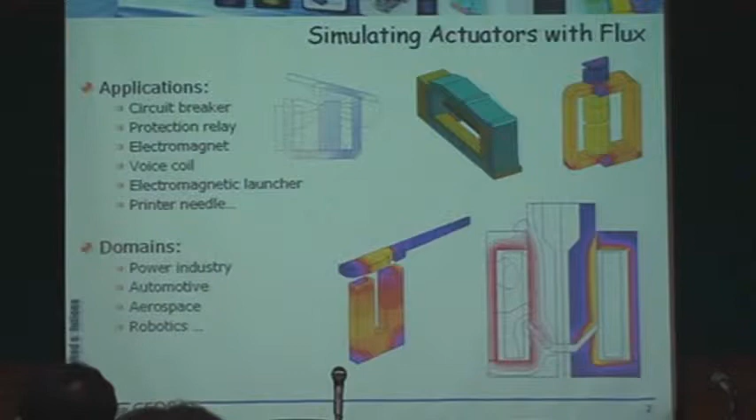Today we will look at a specific application with a solenoid.

When you design an actuator, what you can get with Flux is quantities like induction or magnetic force. These are magnetic quantities, but because we have electric circuit coupling, we can also access electrical quantities like the voltage, the current, or the inductance of the coil. So here we get the typical curve of the current in a coil when you close the air gap of a solenoid.

We also have coupling with the mechanical equation, considering the movement of the mobile part, giving us access to position versus time. So we see the actuator moving from the open to the closed position, with all kinematic values like acceleration and speed, getting the full dynamic behavior of the actuator over time.

To broaden the view of the tools we have for designing such an actuator, we have not only Flux but also Portunus and GOT-It. In Flux we focus on magnetic analysis, available for 2D and 3D in exactly the same environment. We can perform magnetostatic analysis, transient magnetics, and for contactor applications that work in AC, we can also consider steady-state AC computations.

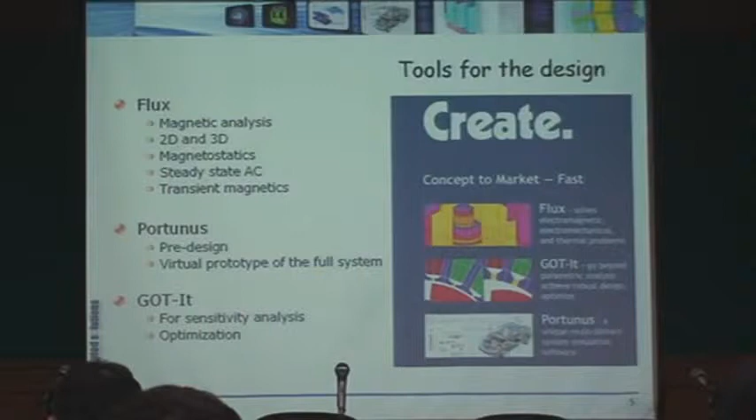And GOT-It - we had this presentation from Philippe. At each step of the design, it helps to do sensitivity analysis, optimization, to get the values of the design parameters from the requirements of the system.

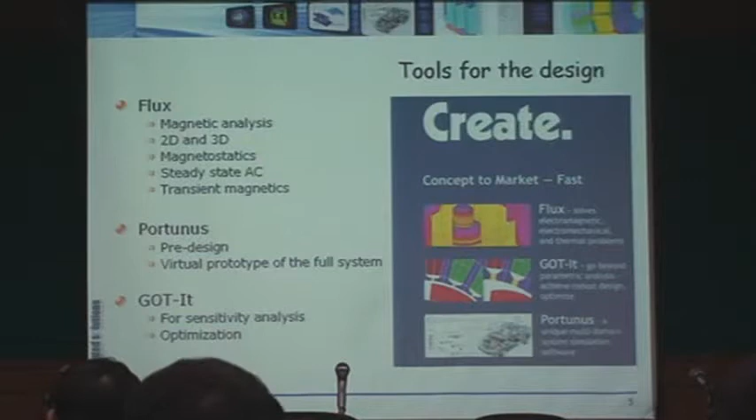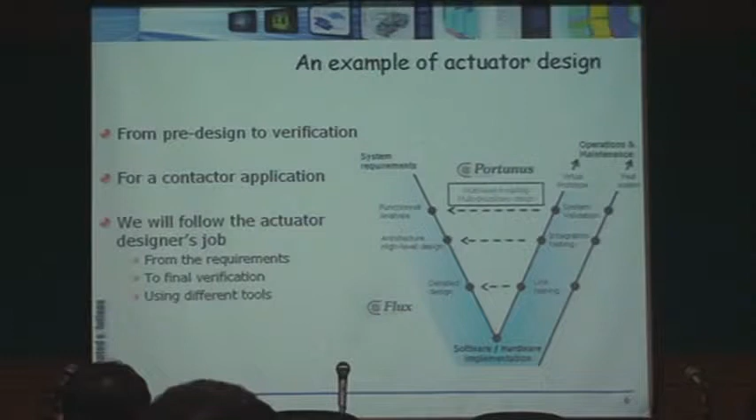The idea here is to take an example and go through it from the pre-design phase to the verification phase. Let's imagine we are a solenoid designer, part of a team designing a system in which there is this actuator. We will go from the requirements that come from the system to the final verification.

We'll start with simple modeling in 2D magnetostatics and go up to 3D calculations, using different tools: Portunus, Flux, and GOT-It. We won't do a full demo of GOT-It, but we'll see some Portunus and Flux simulations.

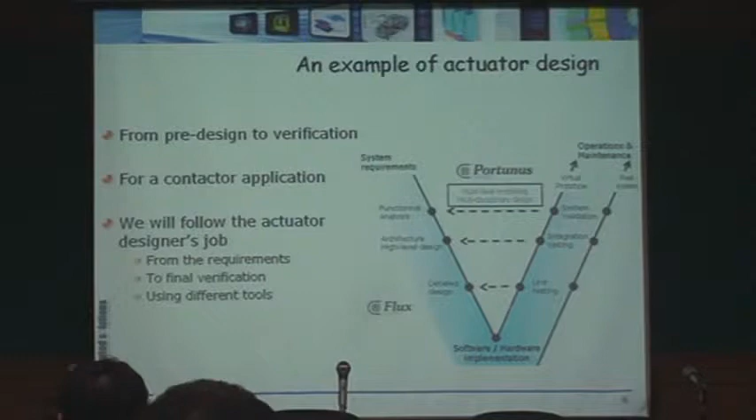Let's begin with the system. What is the system we intend to design, and what is the role of the actuator in this system? The actuator we try to design together is this actuator.

This is the full system, and here you have the actuator. Here you have a power circuit, and the role of this actuator is: if I command it and put it in the on position, it will close the contact and feed the power system. I can turn it on or turn it off.

I have another role for this actuator: if there is an overload detected by this sensor, information is treated, and we ask the actuator to trip and open the contact. So if there's an overload on the line, we open the contact - that's the actuator's role in the system.

So what I propose now is to look at this system modeled in Portunus.

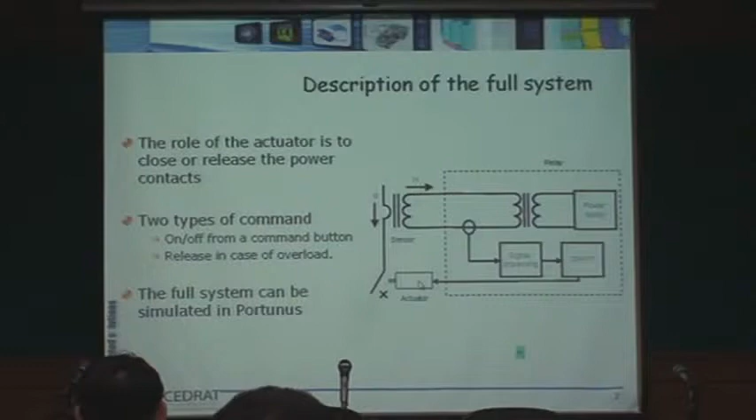So we have the full system here. We have the power line with the switch commanded by the actuator, and the load of our circuit is very simple - just a lamp. We also have a very small resistance to simulate some kind of short circuit on the power circuit.

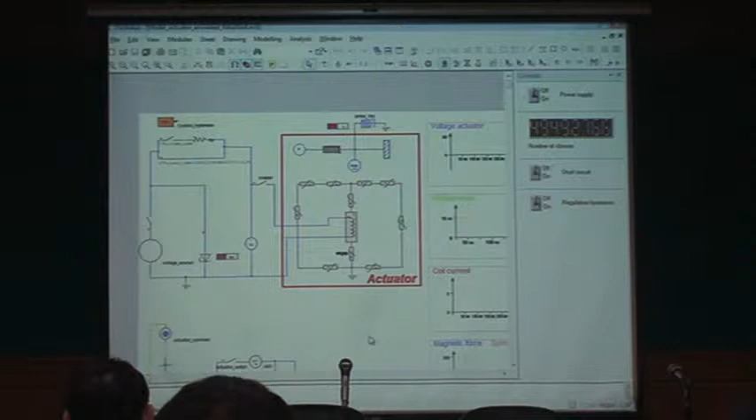On top of my model, I have the electronic circuit that feeds my actuator, with all the control - here I have advanced control, hysteresis control of the actuator. Then I have a first model of the actuator, and at this point I just have the main principle, not the geometry. I just know it will be a simple actuator with a coil, with an air gap that will be closing, and some magnetic circuit.

With this first model, I'm able to simulate the behavior of the actuator. I will run this model, and here I can control the power supply - you see it's on, and then the actuator is closed, and my lamp here is lit now.

I can regulate the current that feeds my actuator, so I can turn it on or off. If a short circuit appears, the actuator will trip the switch and open. Look at this - now whatever happens, if I try to open or close my contacts, it does nothing because a short circuit has been detected. Now if I reset it, it comes back again.

Okay, so now I have my full system, and I know what my actuator should do, and also I have all the requirements for my actuator, because I know now it should close in so much time, open in so much time, and so on.

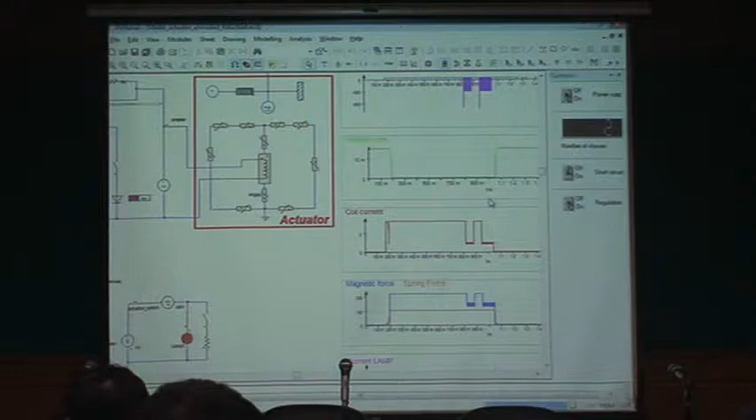So we have the pre-designed phase here of this actuator directly in Portunus. Because we have this reluctance network model, we'll be able to play with this model and determine first dimensions and also some analytical calculations for the coil characteristics, for example. Coil characteristics is not something that you have in Flux. This is something you have to calculate in an analytical way, and then Portunus is able to help you in this situation.

So the actuator will have to close or open in so much time, so in less than 30 milliseconds for the closure time, for example. And we'll have also to ensure some contact pressure when the power contacts are closed. The force on the power contact should be sufficient. So this is the kind of things we have as an entry point to the design.

Then we will enter really the design phase, and we will do this job with Flux. First we'll do some 2D axisymmetrical formulation and from a 2D sketching. So now we have decided a shape of the solenoid, a very classical, very simple shape for this example.

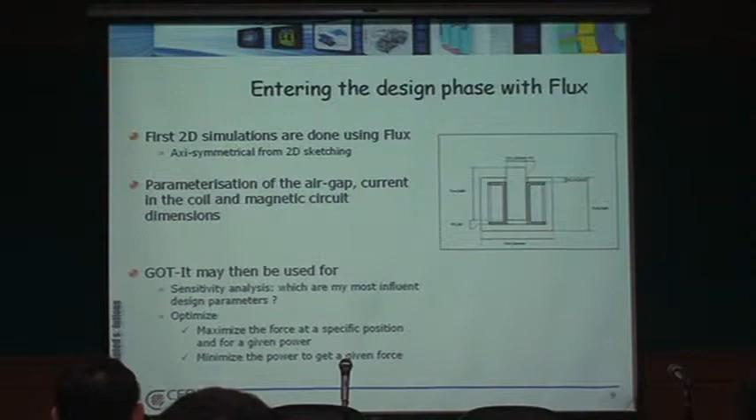So we won't do the optimization, we will just start with the 2D model, and the idea here is that I do a demo directly in Flux and see how fast we are able to get a first 2D model running.

So my supervisor is open here, and then I will enter directly into the sketcher. And if I remember well, I will sketch my actuator here. So I know globally the dimensions.

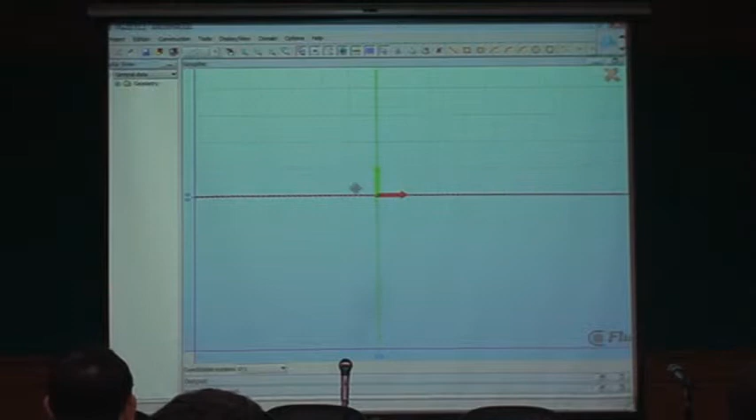Okay, so just zoom at the good scale. Okay, so I need a 15 millimeter air gap.

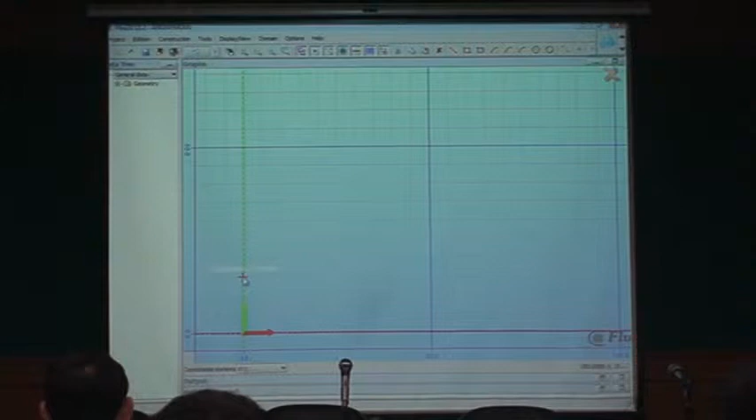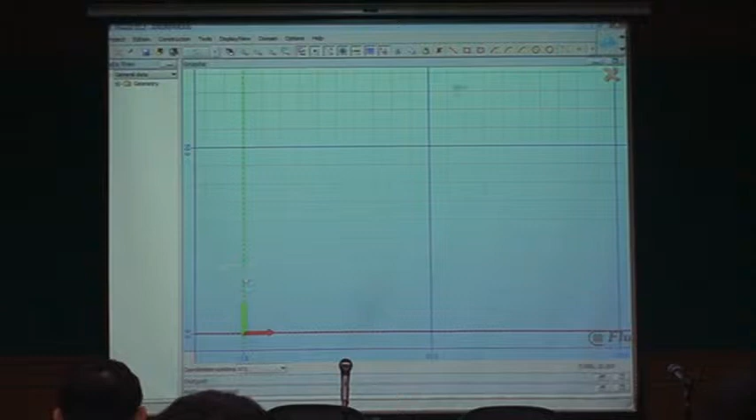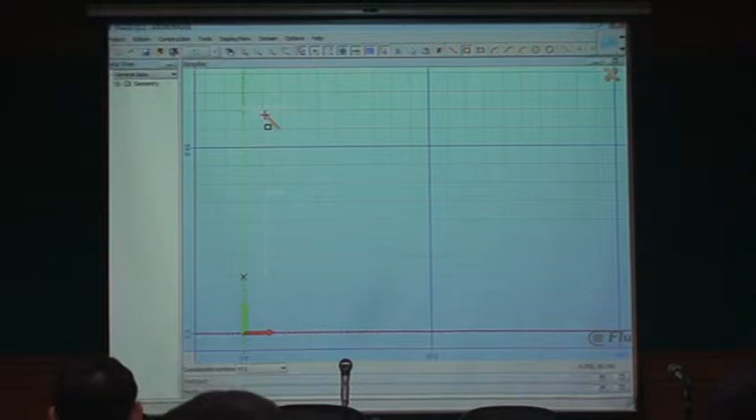So I will start here at this point. Okay, and then I forgot to click somewhere. Okay, so let's put here a 50, let's choose a 50 here, and something close to 7 for... okay, so I'm quite good here. No, this is 35, so let's do it a little bigger. Okay, like this, okay, I'm happy with this one.

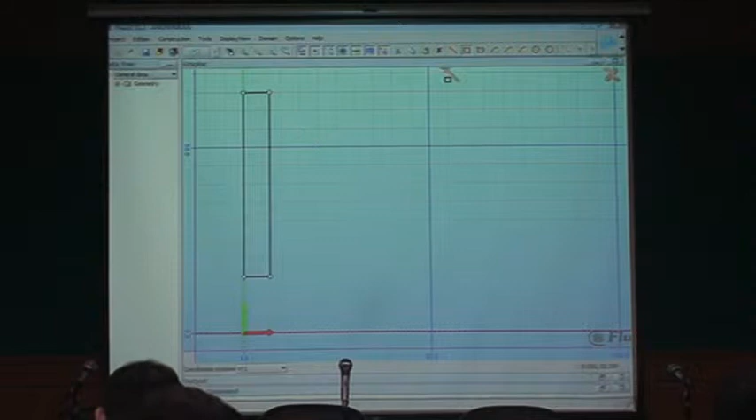Then now I will draw the core. So the core is just starting here at 0, 0. And then I will choose a 5 millimeter here, no, more 30 here. Voilà.

It's 45. Okay, let's do it fast here. So you can see I'm guided throughout the process here. And okay, so I have my core.

So maybe something I want to do is to get closer here, so just move this a little bit, because I think the air gap is too big here. So we'll refine a little bit and put only 1 millimeter between the two.

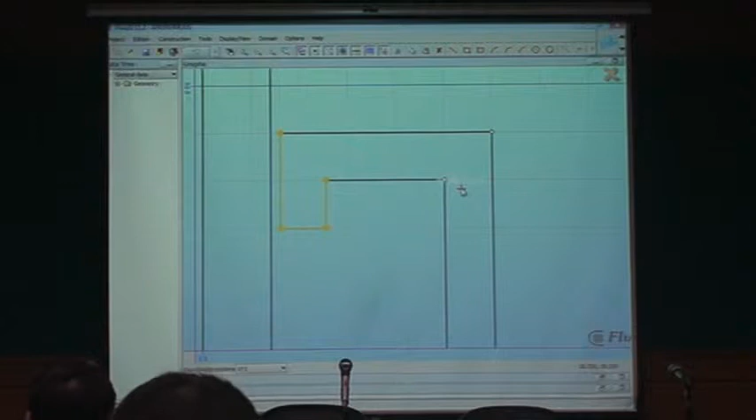And then what I need more now is the coil. So I put the coil in the middle here, somewhere here. Okay, let's draw it. Okay, so looks good. Okay, so I have my actuator here.

So it will be simulated in an axisymmetrical model. So I'm finished here, but the only thing I want to do now is to parameterize the position of my mobile part here.

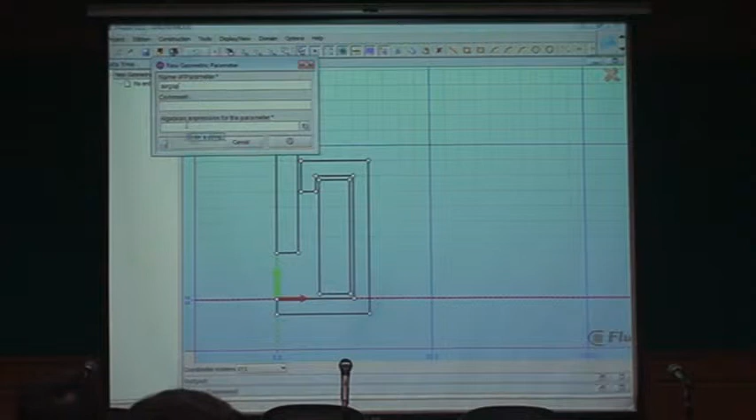So what I will use now is I will create a geometric parameter. I will call it air gap. So it's 15 millimeters, okay.

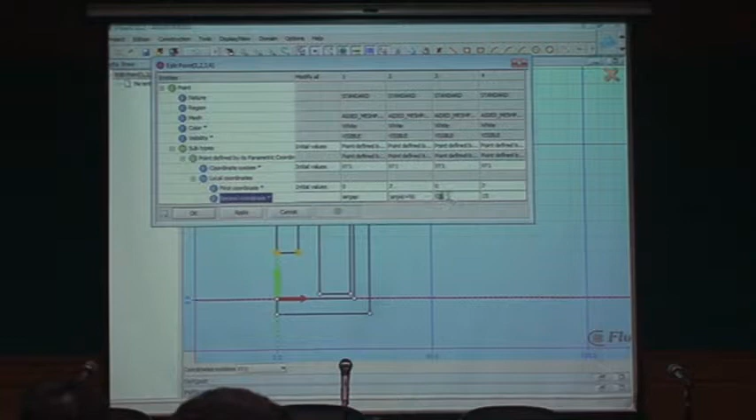And then I will edit all my points here, and I'll be able to parameterize all these 4 points this way. So this is really the value of air gap, and this is air gap plus the size of the mobile. Okay, same here. And then I have air gap here. Okay, should be happy with this.

Okay, so let's check if this is working well. Just edit this parametric jump, this parameter. Let's put 1 here and see how it goes. Okay, I'm quite happy, so it moves as I want it to.

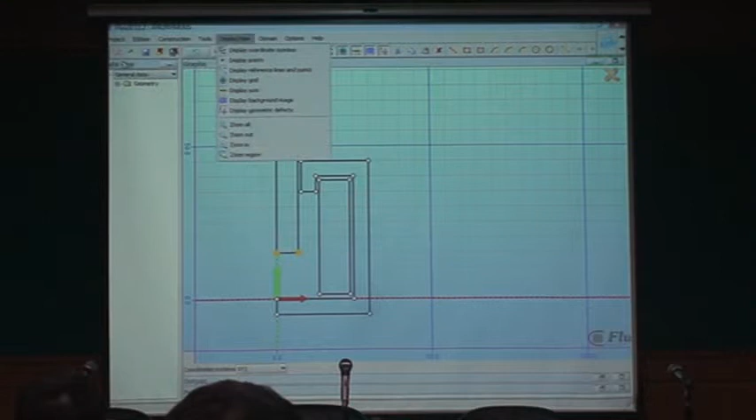Okay, so I'm already finished for this one, but what I need now is to create an infinite box, so just go out of the sketcher. I will define directly my application just right now. It's axisymmetrical, and then I need to create this infinite box here to get the magnetic field correctly in the air.

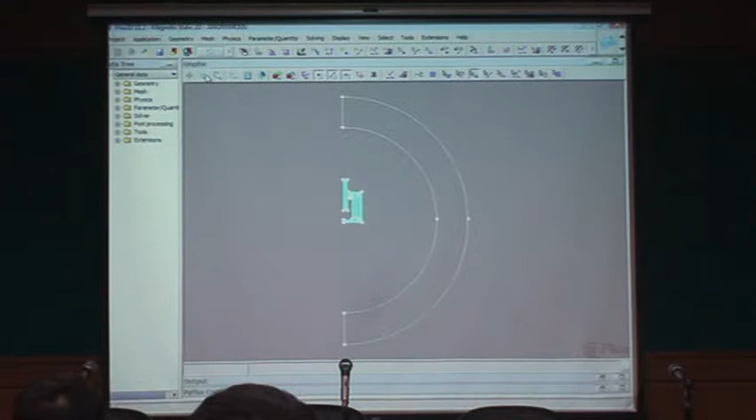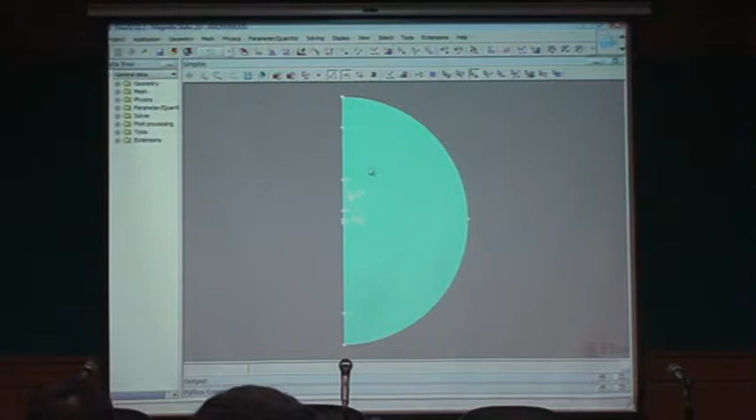Okay, so here it is, and now it will be completed automatically. So now I have all what I need from the geometric point of view. Let's try then to go to the mesh, and let's try the one-click mesh, as I call it.

Okay, this is it. Well, not too bad, but I'm not that happy with what happened here, because I know the air gap will close, and because it will close, then I have to refine the mesh in this area, and also maybe it's good if I refine here.

My choice here is to refine. Maybe I can change just a little bit also the relaxation factor here, and I will just change the mesh on this point, this point, this point, this point, and this point, and I will put a small size.

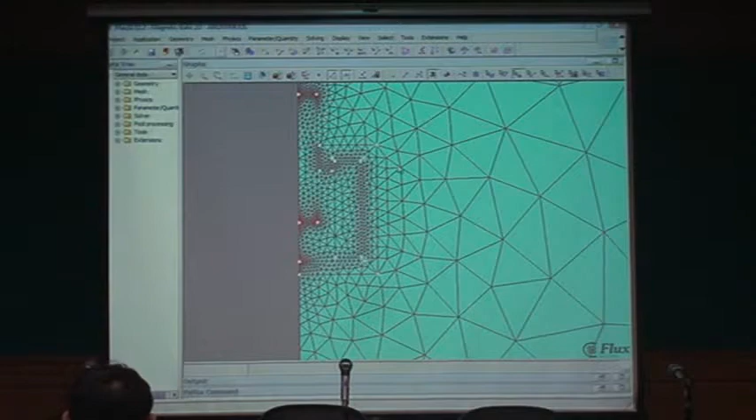And what is small size? Just have a look at it. The small value is, I will put something like 0.25. That will be the value I will use for the air gap when it is closed. So I apply here and mesh again. Okay, so looks quite good for me.

I'm quite happy with this mesh. So maybe the good thing at this point is to save. Let's save it.

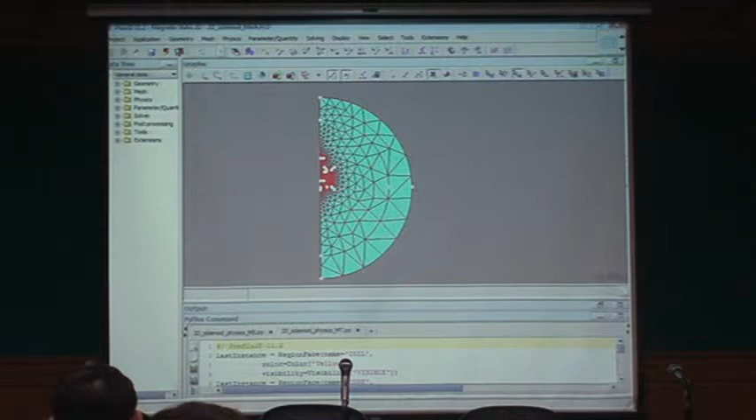Okay, and to get quicker to the results, I have prepared a Python file. And this Python file just defines the geometry, so the different regions. It will characterize, so you have the material also here that is used. It will define the characteristics of all the regions automatically. So I don't want to do that just in front of you.

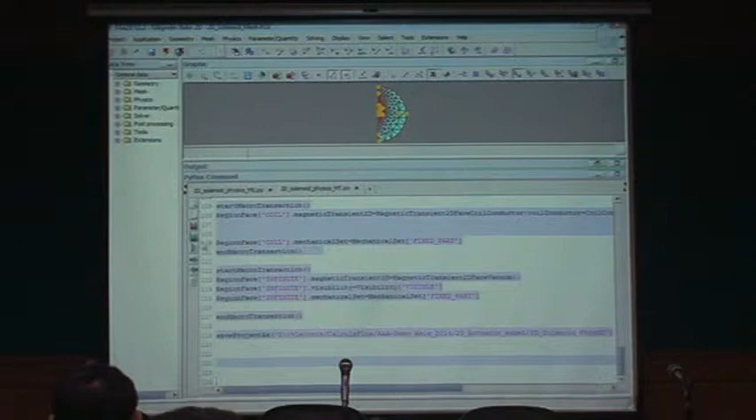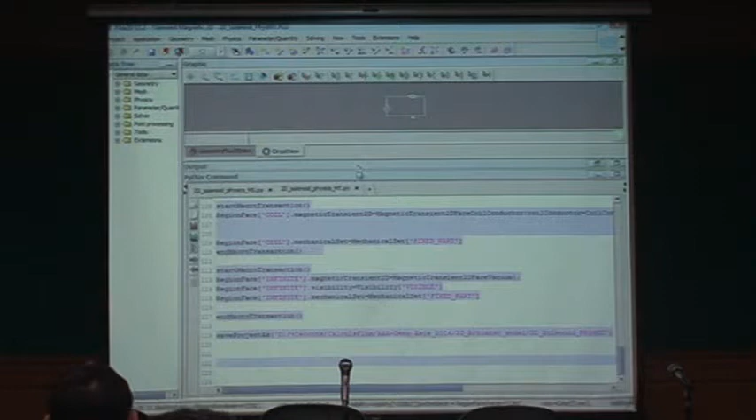So what I do is I just select all my file here, and I will just run it. So here, when I click here, it runs all what I selected in the Python file. So just now close this window. So I see now I have a circuit. This is not what I wanted to do, so I'm stuck here.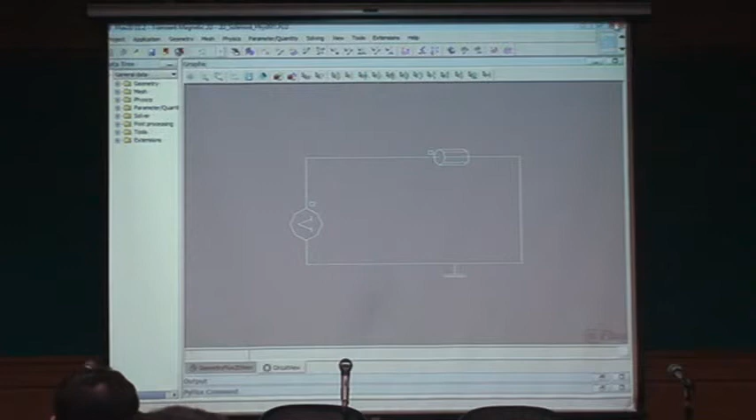Okay, I defined a magneto transient. I wanted to define magnetostatic physics, so I will close this one and reopen another one, which is magnetostatics.

So my aim, in fact, now is to calculate some surface response. My model is almost ready to solve now, and what I want to get is the flux in the coil and the force on the mobile part versus position and current, so position of the mobile part and current in the coil. And these tables, I will be able to use them in Portunus to represent the behavior of my device.

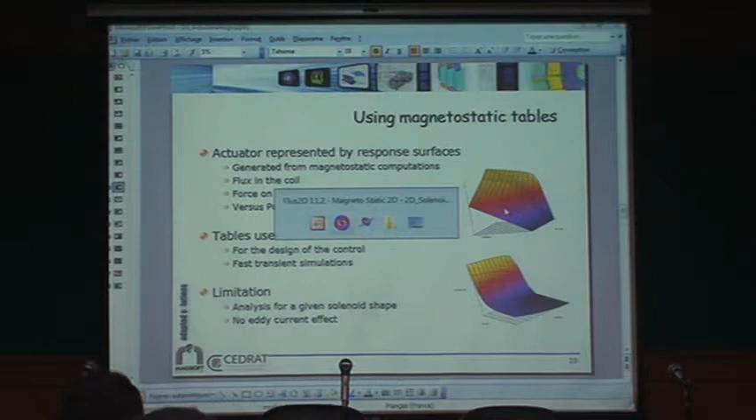So let's go and do it in the software. So I have my magnetostatic model.

I also have some parameters like the force, the current. I have some sensors ready. So this is the flux and the force on the plunger. And then now I have just to solve,

creating a new scenario. And because everything is parametric here, I will be able to select the air gap. So I will start with 0.25 with a higher limit of 15. And I don't want to do too many steps, so I will add a few steps only.

3, and then I refine at the beginning, and then let's put an 8 here, and then 10, 12, and 15. Okay. So I will have 10 computations for the air gap, and so I have to use the current.

So the current is really controlling the current in the coil. And for the current, it goes from 1 ampere to 4 ampere, and let's put 4 steps. So 4 steps times 10 is 40 computation. Just apply it and just solve now.

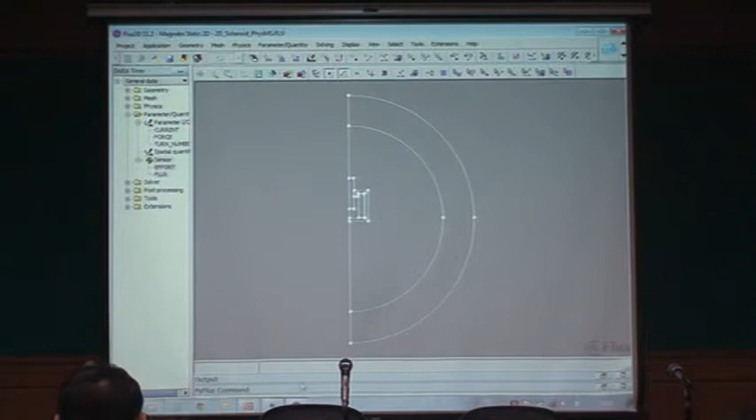Of course. What I didn't do is that I had to first assign the regions, because I have defined all the regions, but I didn't tell what region was, what face was affected to a region. So this is air.

This is my plunger. This is my coil. And this is the core.

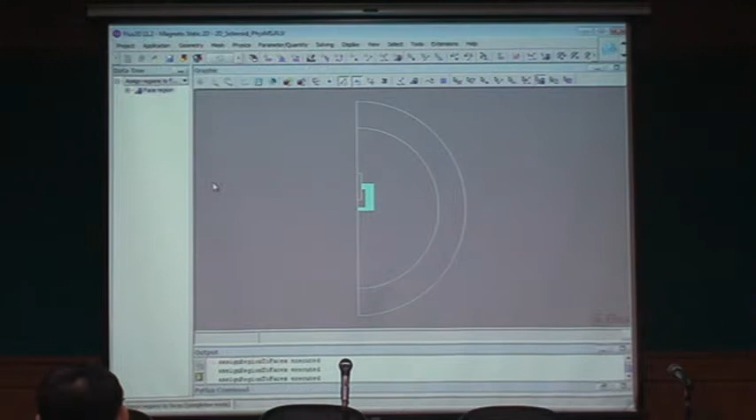Okay, so this time should be ready to solve also. Okay, so it will solve for the 40 steps. So it goes quite fast.

After 4 steps, it takes a little bit more time, because then it remeshes, it changes the position. First, it changes the current, so it changes very fast. And then it changes the position, and at this point it has to remesh automatically all the geometry.

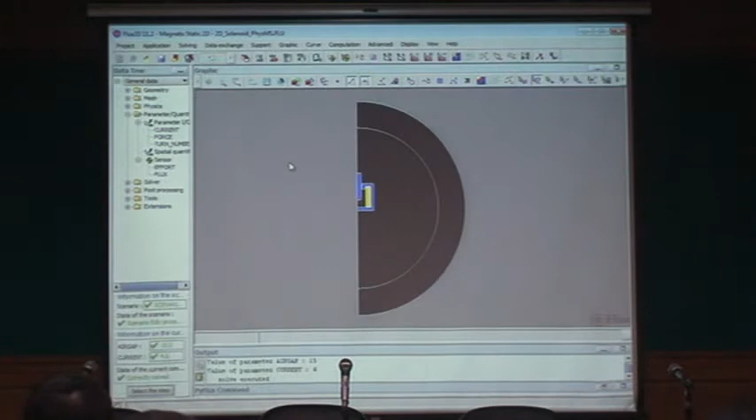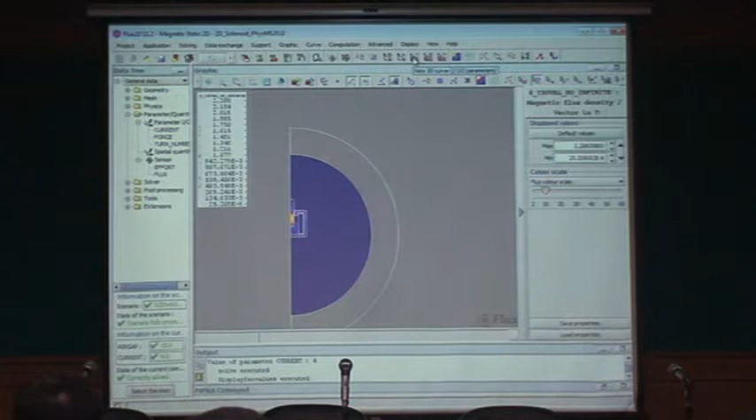Okay, so we are close to the end here of the calculation. And then we will have a look at, maybe just here to check. Okay, looks quite good. And now what I want to have is the curve, so the different curve versus air gap and current.

So what I want is, I think is force. Or EFFORT, okay. That is one, and then the flux. I just type it like this one. Okay. No, not on the same one.

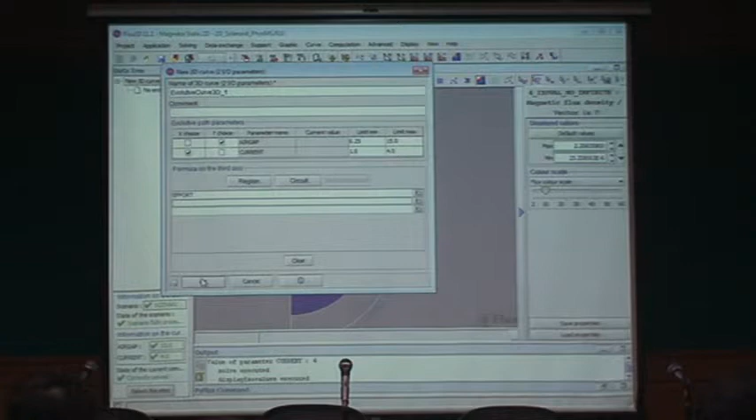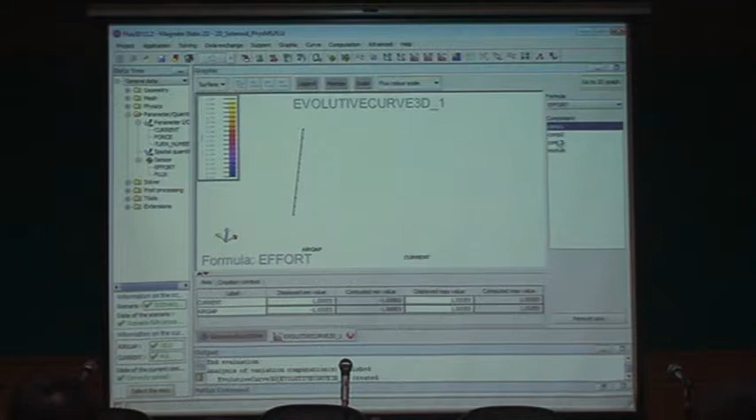Just the force. So the force, yes. That was EFFORT. I don't know why. Okay. We have to move it here. So we have our curve here, and we can get exactly the same for the flux.

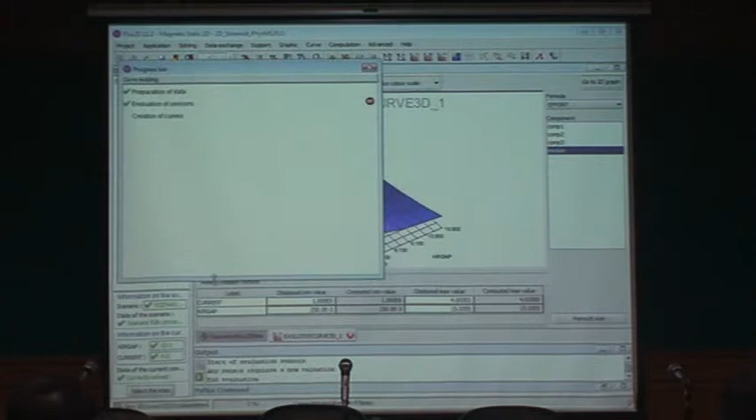Okay, so I have my curve here, and we can see also the effect of saturation with the current, and we have the effect of the air gap.

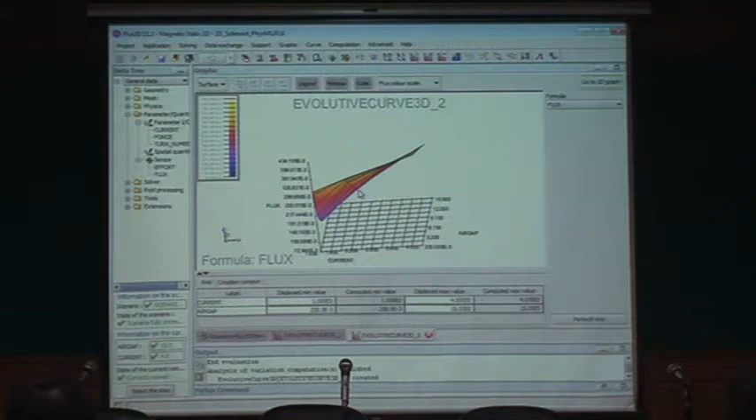Okay, so now I have my tables, and this table, what I will use them for is to verify that this design, if I put this design into the system, does it work as it was intended to work? And because it's in Portunus, then it's fast. So let's try this.

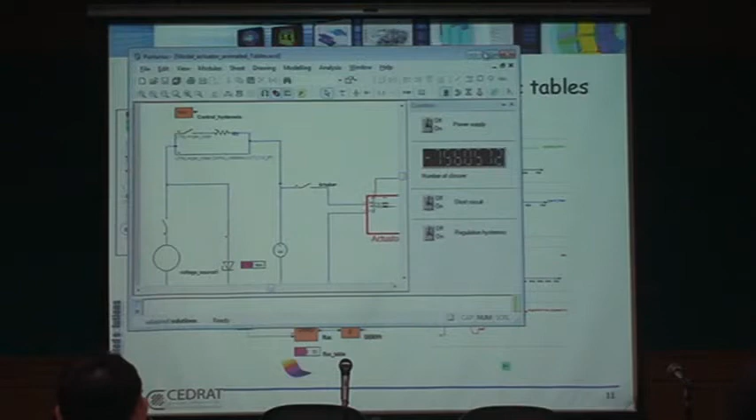So we have this model. We go back to Portunus. And when we compare this model to the model we had at the beginning, now the actuator is no more represented by a reluctance model, but we have a full model with the tables.

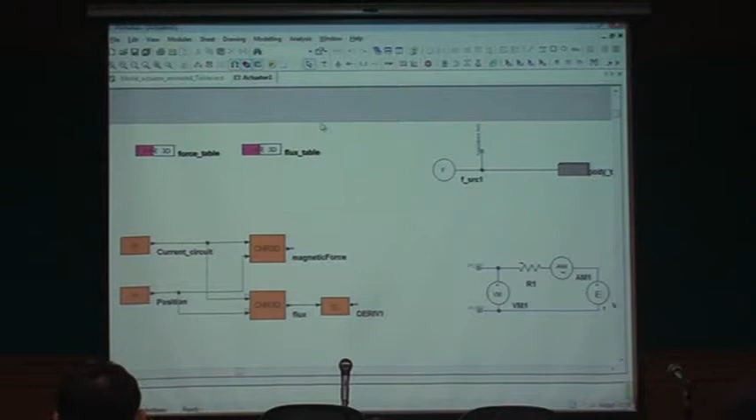So I have a subsheet here with the force table and the flux tables, the one that I just created, and it's now ready to run, and I can check if all of this runs correctly.

So the lamp is hidden here, so just turn it on. It takes a little bit more time to compute. The tables is something simple, but not as fast as a reluctance model. So we can check once again that if I short circuit, you see, when I click on short circuit, then the green will just disappear, and just a little after the red on the lamp also will disappear. So hop, hop.

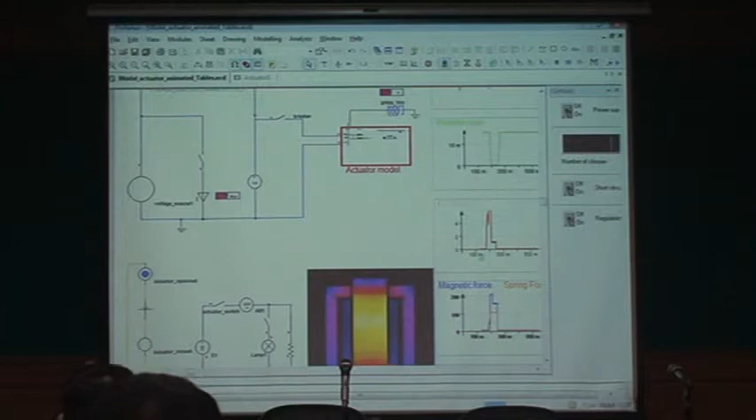You see, so the actuator really did its job, and we have all the curves here. We can check on the coil current, we can check the core position and the magnetic force, the spring force, and all this stuff.

Okay. Then let's close this model.

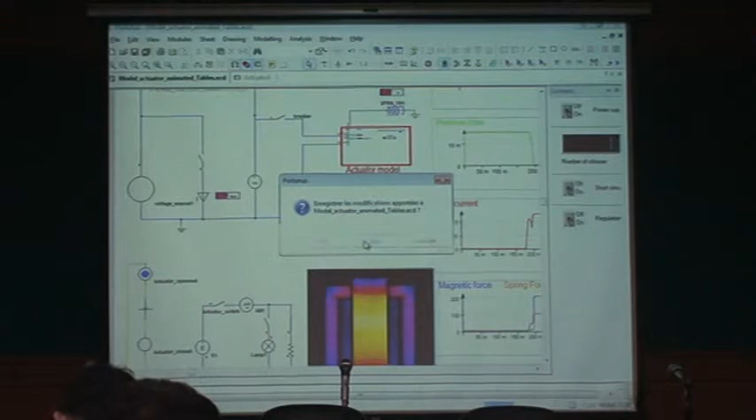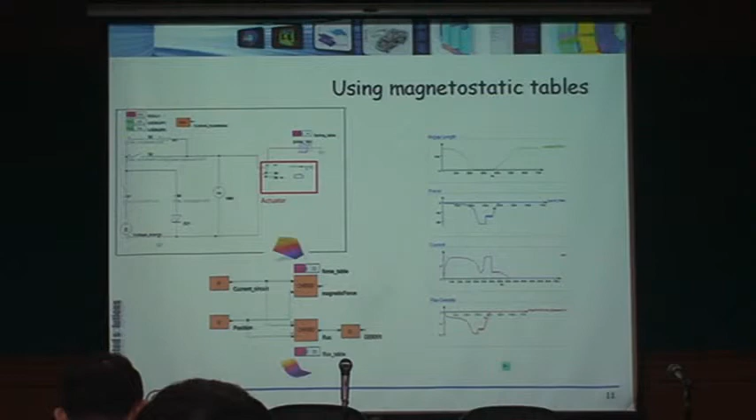The limitation of this kind of calculation is that we don't consider eddy currents in the actuator. And it may happen in some cases, if you have a high-speed actuator, that you have eddy currents, and this is something we would like to check.

And to do so, we have to go to magnetotransient analysis. Magnetotransient analysis will have the current variation directly in the coil with flux. We'll have the movement, and we'll be able to measure the effect of eddy currents.

For example, here we have the curve of current. Here it is characteristic from the moment at which the actuator is closing. You see that it is closing a little bit later, and also if you look at the integral here, you can see that more energy is necessary to move the plunger.

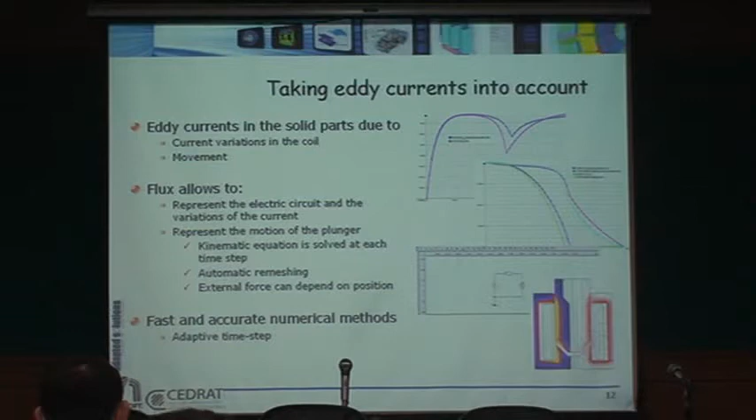So the eddy currents we will take into account are really the eddy currents due to the current variations and to the movement, both. And everything will be calculated automatically.

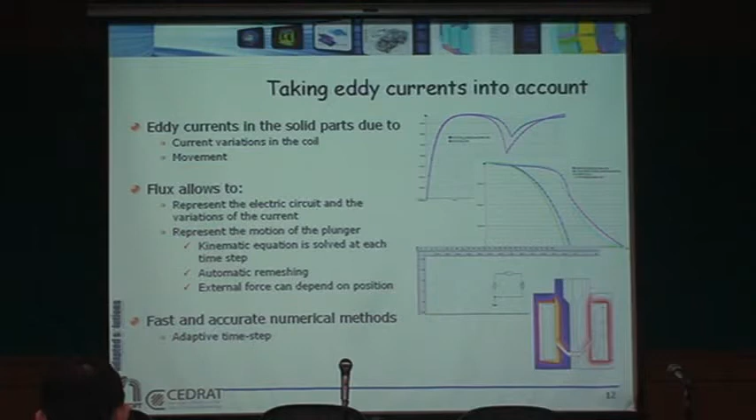And what we have, and which can be interesting, is the adaptive time step, that we choose the time step in the software just to make the necessary calculation during the time.

At this point, we also can use GOT-IT, and it can be used with a transient model. And at this point, then, we would minimize the response time of the actuator for a given power. So we have an example here where we have 15% of gain between the initial device and the optimized device for the response.

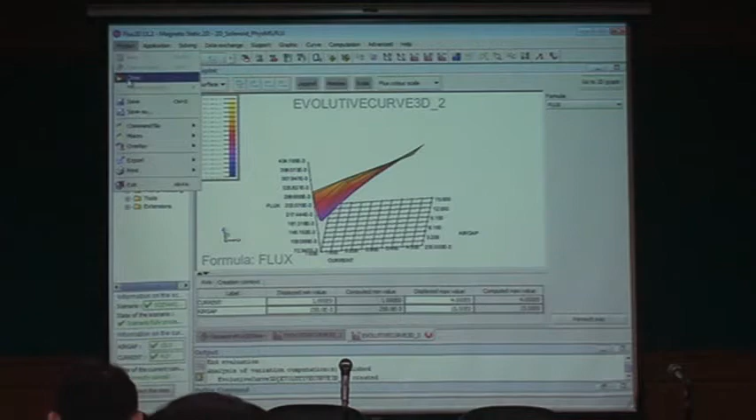But let's go back to Flux, and we won't solve the transient model. I have solved it. I have prepared a model already with everything solved, and then we'll be able to look at this model and see what we have.

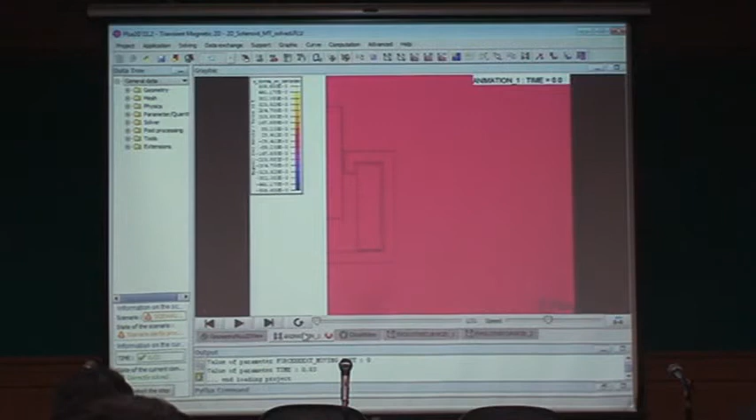And maybe the first thing we can look at is a movie. The movie is interesting because we clearly see the effect of eddy currents here.

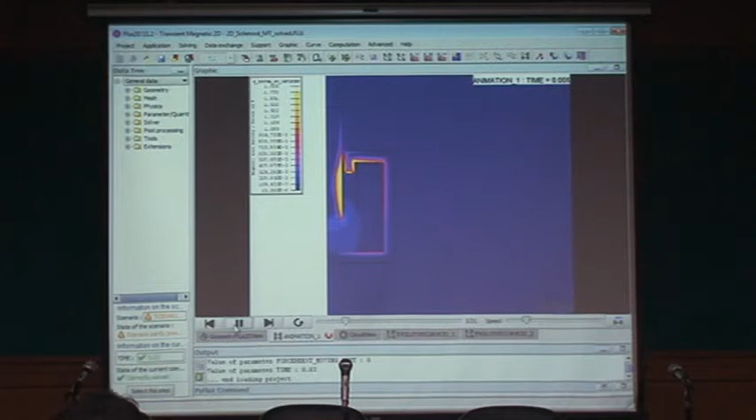So what you see here, if I go back to the first images, you see the flux here has not really penetrated in the bulk of the core or the plunger. So this is really due to the eddy currents that prevent the flux from going deep at first in the matter. So when time goes by, then you see the flux that is going inside really the plunger, and also we have the movement and everything.

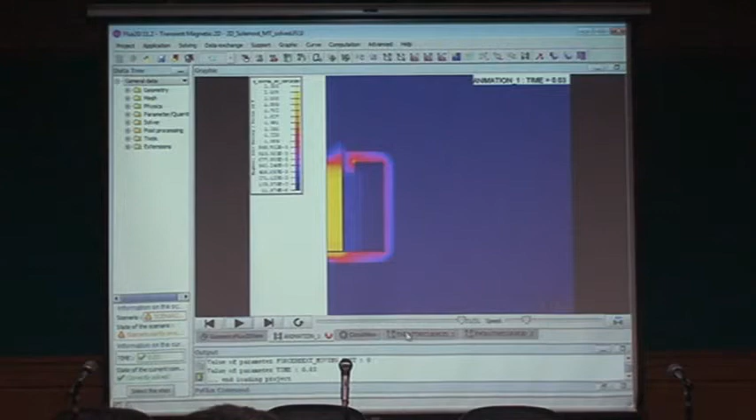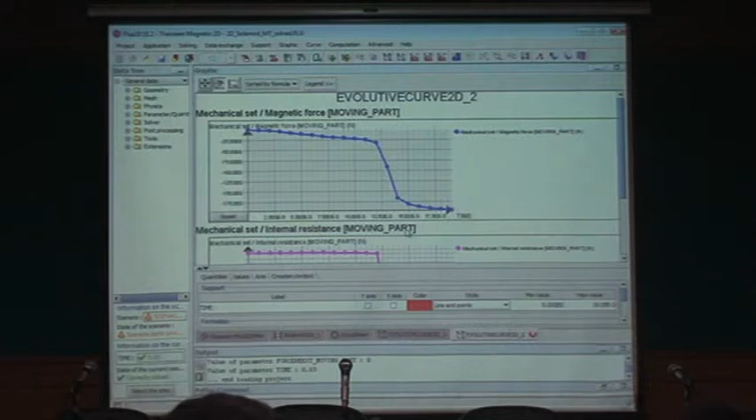This is an interesting curve in which we compare the resistive force. The resistive force is a spring. What we can see here is that the spring force is changing with the position.

So this is something that was entered and that was defined thanks to a tabulated parameter. And this is usually the case for an actuator. It has to face some force that really depends on the position.

And we see here the electromagnetic force. And in fact, the movement will begin just at this point. And because there is some inertia here, we see it goes, the force is stronger than the spring force, and can overcome easily the spring force here, getting up to 175, even close to 200 newtons. Okay?

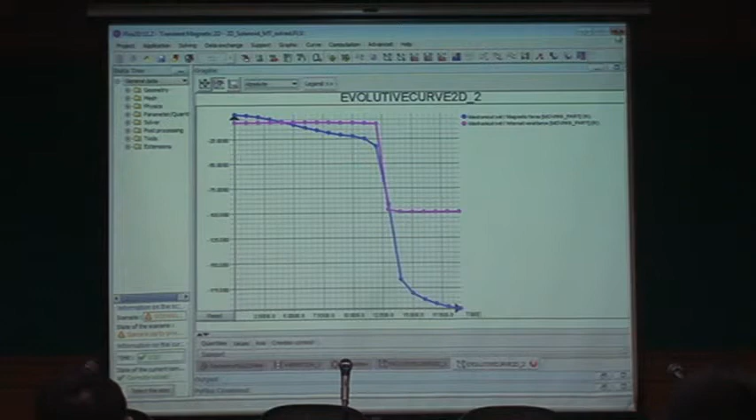Going back to my presentation, up to now we had just the Portunus with reluctance model, with the tables.

We could see in Flux that eddy currents can have an effect on the behavior of our plunger, of our solenoid. So now if I want to consider the full system with the eddy currents, I have to go into Portunus, and it is possible to do co-simulation. We replaced the table by a Flux component into the system model.

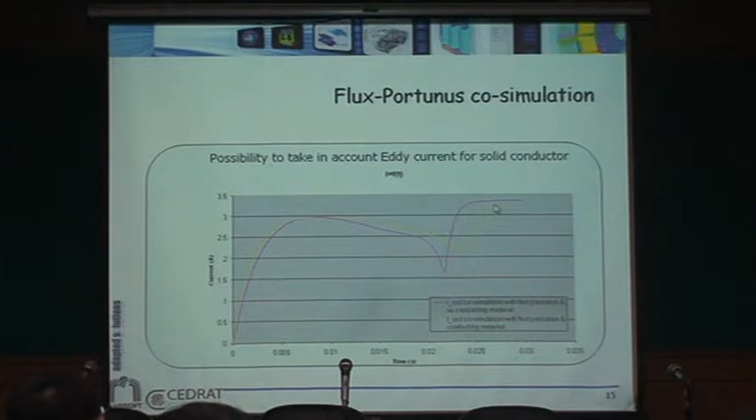The kind of results we can have: in yellow, we have the curve we obtain in Portunus with eddy currents, and the curve we get in Portunus without eddy currents. So we clearly see here the effect, even at the system level, of the eddy currents.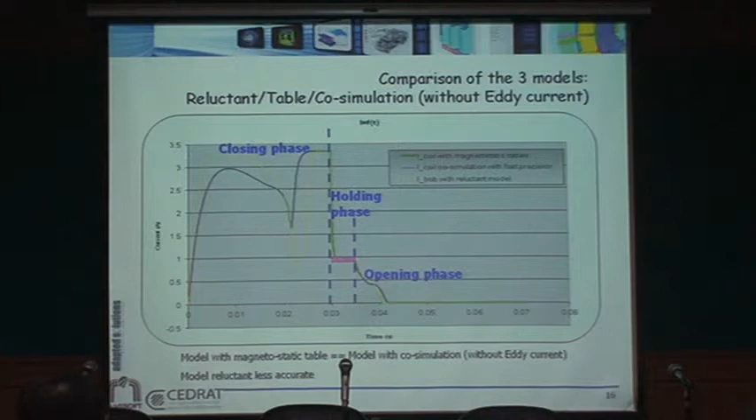So it's only for pre-design, right? But when you go from reluctant to co-simulation, then you need more time to solve.

Now we are at the last step of the design, we go to the mechanical design. Because I'm just the electromagnetic designer, I won't take care that much about mechanical things, but when I go to see the CAD people, maybe this is what they will draw on their computer with Creo or with Inventor or some other CAD editor.

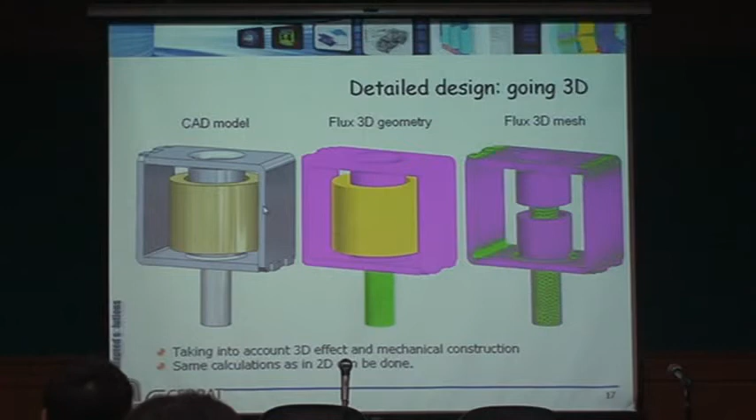And then I have to check in Flux 3D that this design really corresponds to the requirements. So what I propose here is to do the job and just import the CAD model and bring the mesh to this model. So I'm now in 3D.

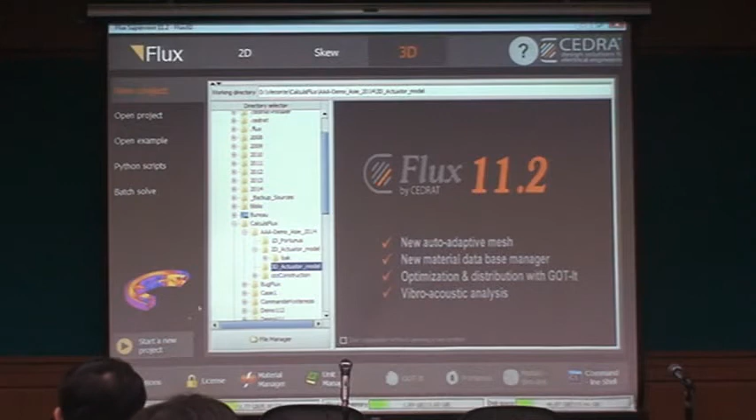I will start a new project in which I will import the CAD model the mechanical guy just gave me, and mesh it automatically.

Just wait for Flux 3D to start. So I think now I'm ready, and I will import. I have several formats of import, but what I have here is a step file.

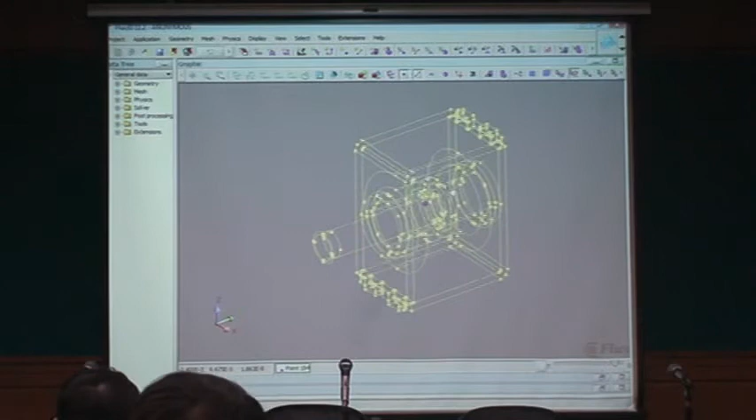I will select my step file. It is ready here. Click on OK, and then the software will import and do some healing operations automatically, some assembly operations automatically. And here I have the faces, I have some volumes available.

And what I need before we go further is to define the air all around my geometry. So I propose to put the same size as for the 2D.

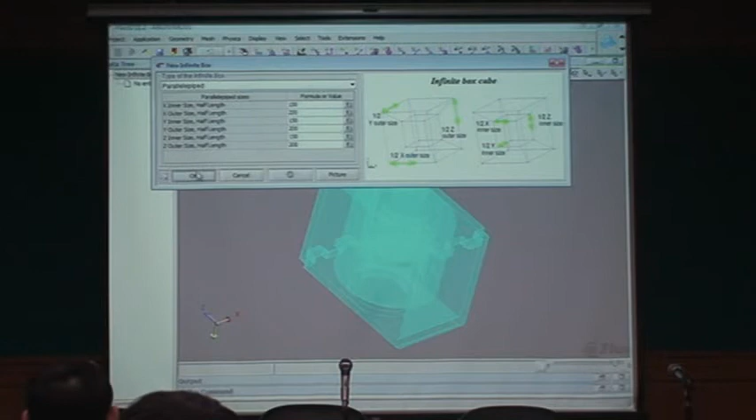It's there, and making sure I have everything I need, I've completed it automatically. That will build all the face volumes just all around my geometry.

Now just go to the mesh, and I will just mesh the faces. So it may take some time, and why it takes some time is we will see it when we go deeper into the model. There were very, very small air gaps.

Very small air gaps in the shape of the core. At this point, the software is trying to refine the mesh just in these little air gaps, and we'll see it does a great job in the end.

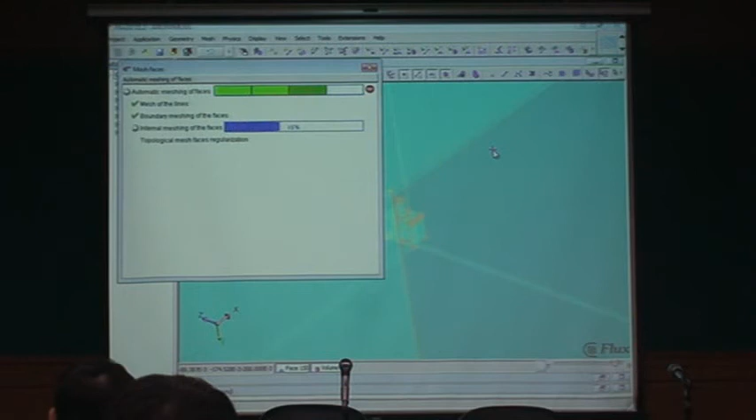And the nice thing is that I have nothing to do. I can talk with you. I can have coffee or tea. So that's nice. I hope I only have time for one tea, no more.

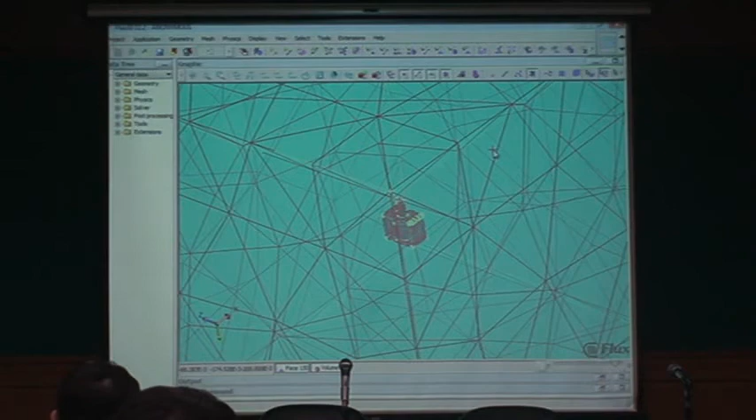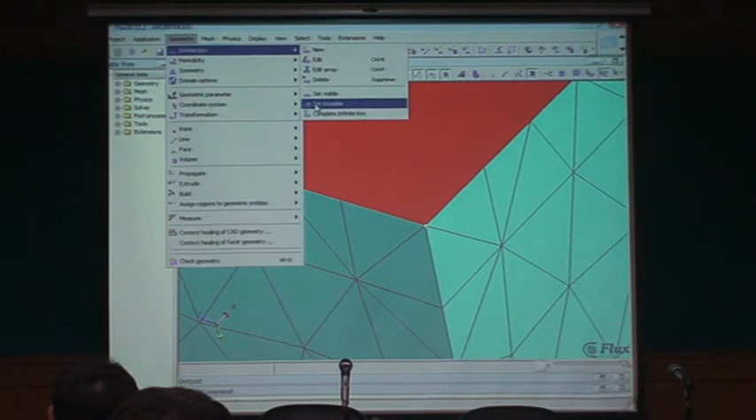Okay, this is finished. And by the way, I don't want to look at the infinite box that much, so I will just set it invisible so that we just focus on the device. I don't like to see the box.

So you see here my mesh. Personally, I'm quite happy with this mesh because it's refined in the corners, in the rounds here, and also the little air gaps we have, they are somewhere here.

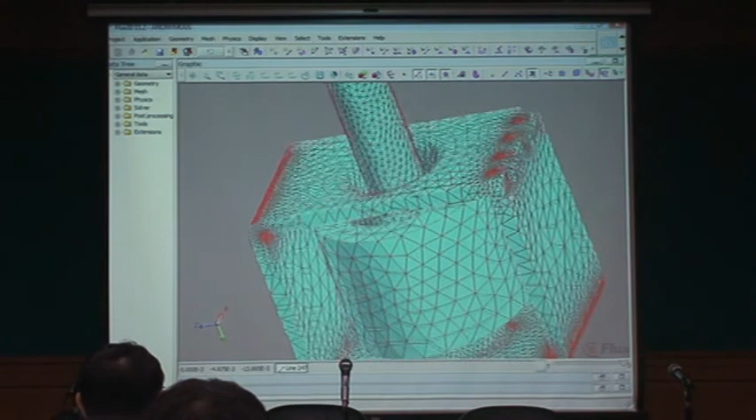Let me just zoom. So you see here, I have little spaces here, and then the mesh was very well adapted to this situation.

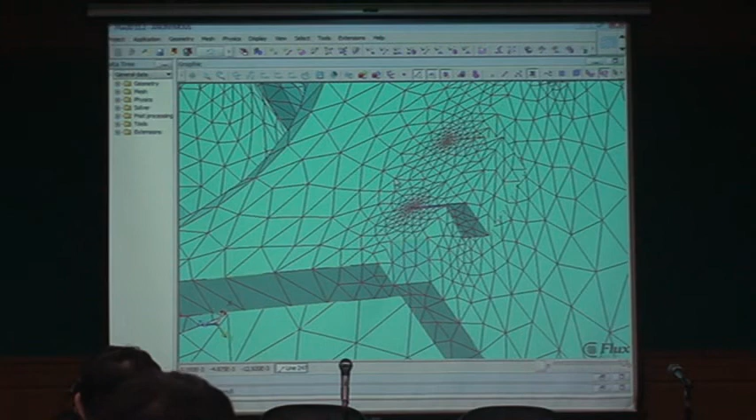So of course now I won't go through the whole process for 3D. In fact, this is exactly the same process that we could follow with the 2D. Of course, all the meshing or the solving time will be longer because this is 3D. But from the user point of view, the operations you have to do are exactly the same.

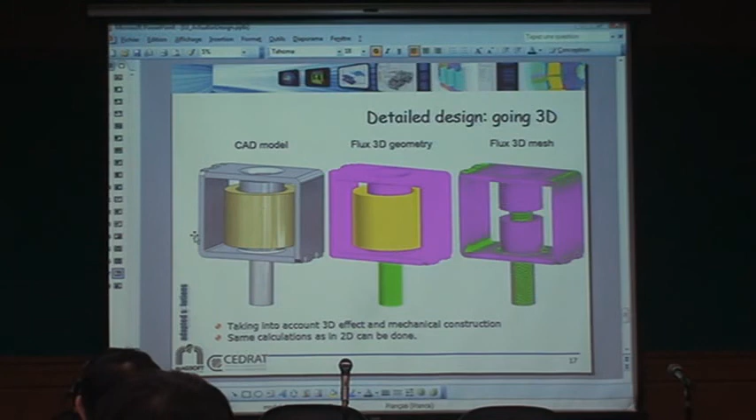Then I will consider we are really at the end of the story. We could check in 3D our design from the real CAD model, and we could really go from the early design phase to this verification phase with the great features of Flux for this kind of design.

We could see interesting features like Sketcher, the 3D import, the automatic mesh generation, the parametric analysis. You could see it was very intuitive and very straightforward to get this parametric analysis. The circuit coupling, the motion, of course, and GOT-It and Portunus that can really bring very interesting things during the design.